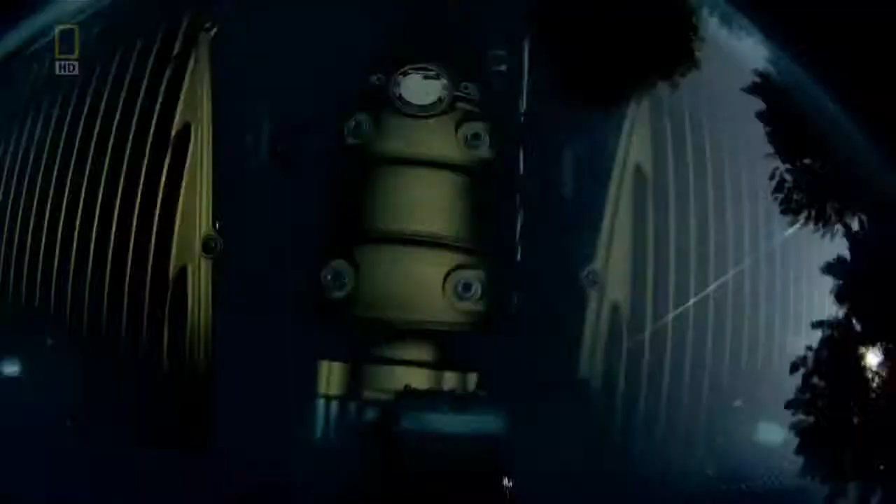This is the story of an engineering crusade to create a car that will persuade the world's richest people to part with €1 million, a challenge that's pushing one of the greatest ever car designers to his limits.

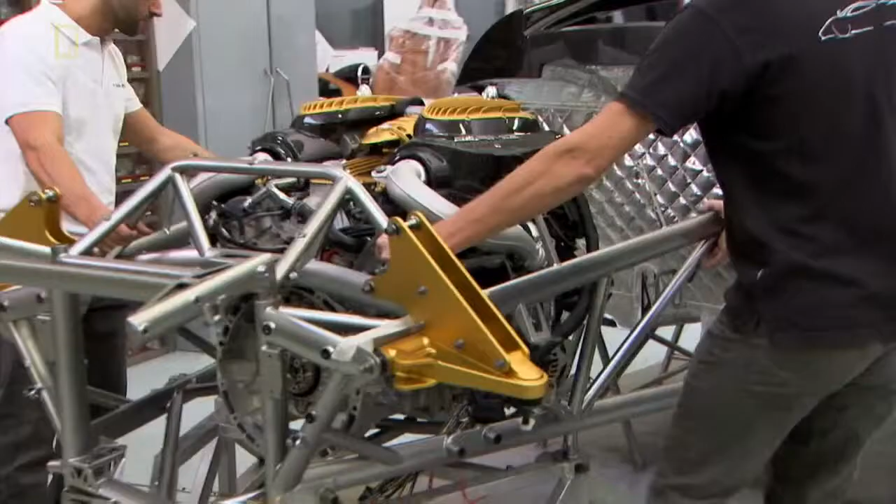In a building that's more like an artist's studio than a factory, a man inspired by Leonardo da Vinci, a man who must be surrounded by the right smells to think, is pursuing his ultimate dream: to build a car that is both an engineering marvel and a work of art. An automotive masterpiece born of a pursuit of perfection so relentless, there's a danger it may never be finished.

Named after a god of wind, this is the Pagani Huayra. A car that has something so special, its creator believes that people will pay €1 million to own one. But why?

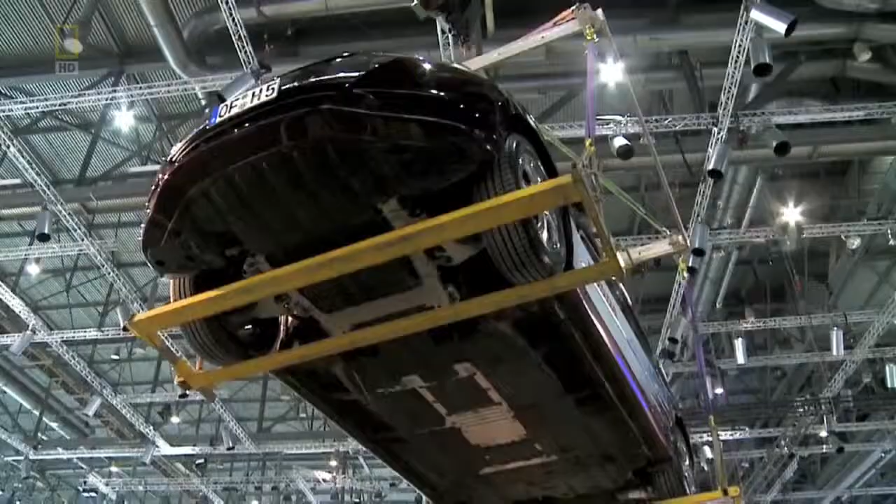At 10 a.m. the doors open and thousands of journalists and car lovers flock to the Geneva Motor Show. The star attraction is the unveiling of Horacio Pagani's new car, his €1 million Huayra.

But there's a twist. While this may look like a finished car, it's not. In fact, despite years of development, it's far from complete. It may sound crazy to expect buyers to commit to spending €1 million on a car they can't even test drive. But not in the world of Horacio Pagani.

Because this is the man whose first supercar, the Zonda, stunned the world on its launch and is considered by many to be one of the greatest sports cars of all time. So within days of the Huayra's launch, Pagani's reputation alone is enough to secure the first orders. And as the Geneva Motor Show comes to an end, the worry for his team is not getting sales, but actually finishing the car so they can build and deliver them.

Back home in Italy, Horacio Pagani has been developing this car for over 8 years. In his pursuit of perfection, he is not a man to be hurried.

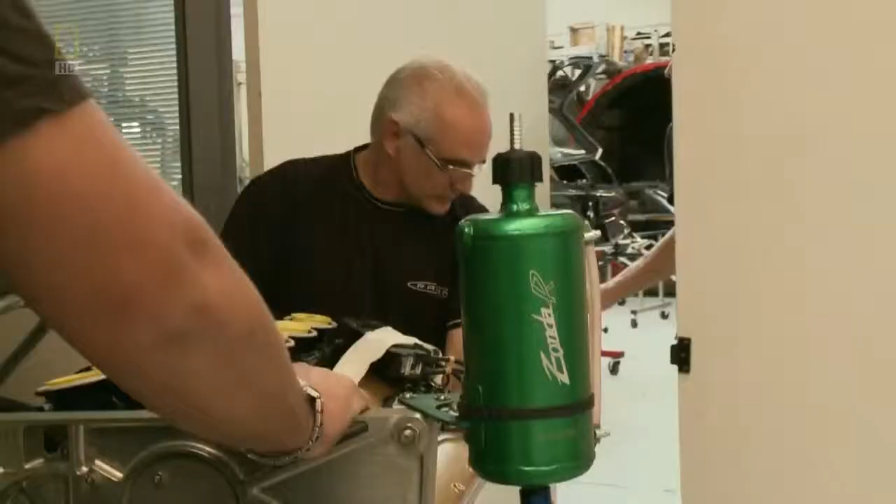Horacio personally designed his small factory, or atelier as he prefers to call it, with his assembly room, component manufacturing, and design studios, all under one roof.

This isn't a place where machines are bolted together by robots. Pagani's master craftsmen hand-build engineering works of art. Over the last decade, they've produced 150 unique Zondas.

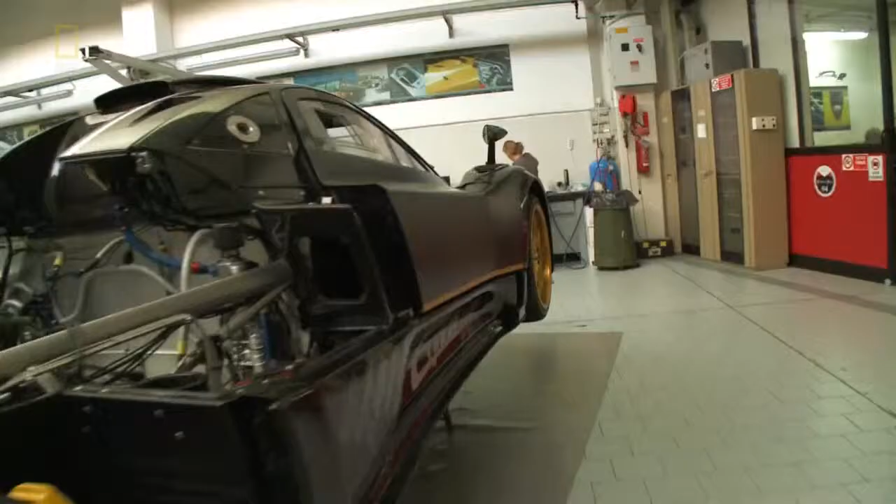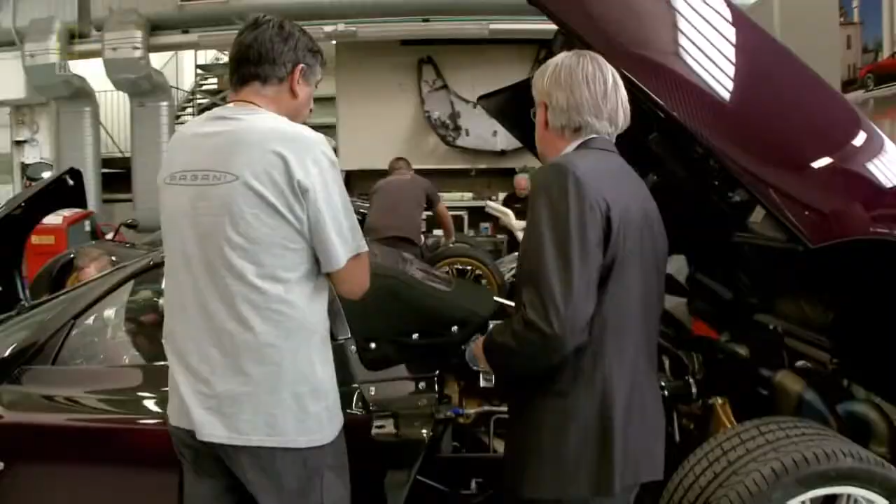But now they're waiting to start building the Huayra, as soon as the boss gives them the nod. But that won't happen until this man's work is done. And 800 kilometers away in Germany, he's still got plenty to do.

Because before any customer will be allowed to drive the Huayra, its extraordinary power and performance must be tamed. Over the last 2 years, Davide Testi has driven a series of Huayra prototypes the equivalent of 25 times around the world. I am the million-kilometer man in the €1 million car.

And follow me, and this is my office.

Today, a full 6 months after the launch in Geneva, Davide is getting his first taste of a vital new addition to the car: Bosch's ESP, Electronic Stability Program, a step on the road to a crash-proof car. The system goes far beyond traction control and anti-lock braking, with electronics that can assist or even override the driver to keep the car on the road.

Straight away in this tight corner, I am accelerating fully, and the ESP helps me straighten the car, keeping me on the road. But making this futuristic system work on this car is going to be no mean feat.

Combining a very light overall weight with a massive 730 horsepower, even a racing driver like Davide must show respect. This monstrous 700 horsepower, 1,000 Newton meters of torque is something truly awesome.

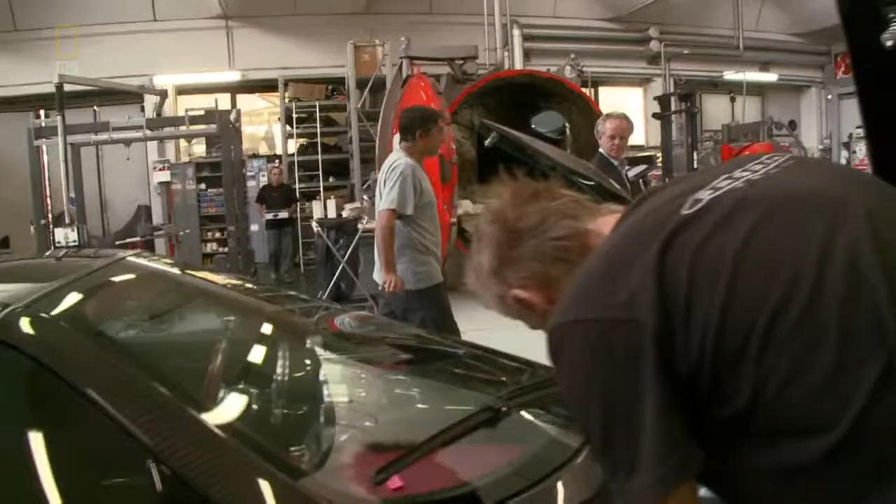Down in assembly, a new chapter for his team of mechanics begins. And the first job is to get their heads around the new parts.

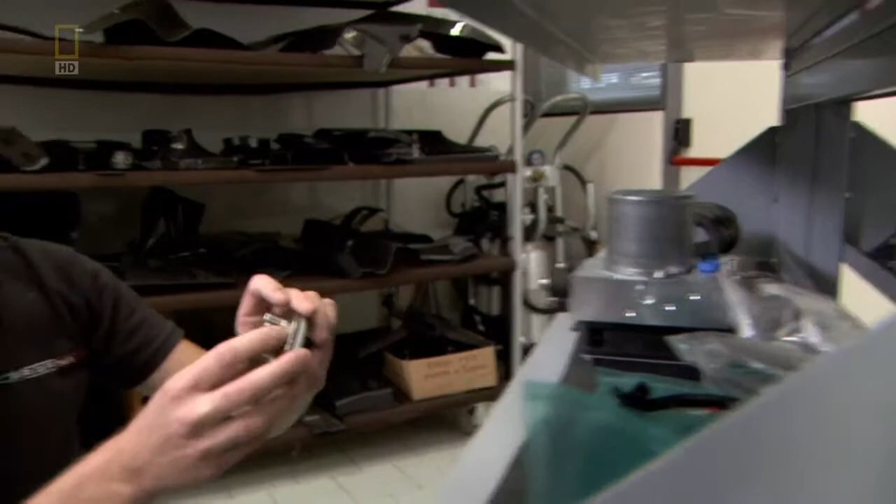Well, this has all been prepared by the guy in the stores. This is a control unit and the ABS. Obviously, you've got the monolock wheel nuts here. These are the suspension arms. Perfect. As you can see, everything's got their part number. Everything's marked with the Pagani logo. Every washer is like detail. It's like it's a work of art.

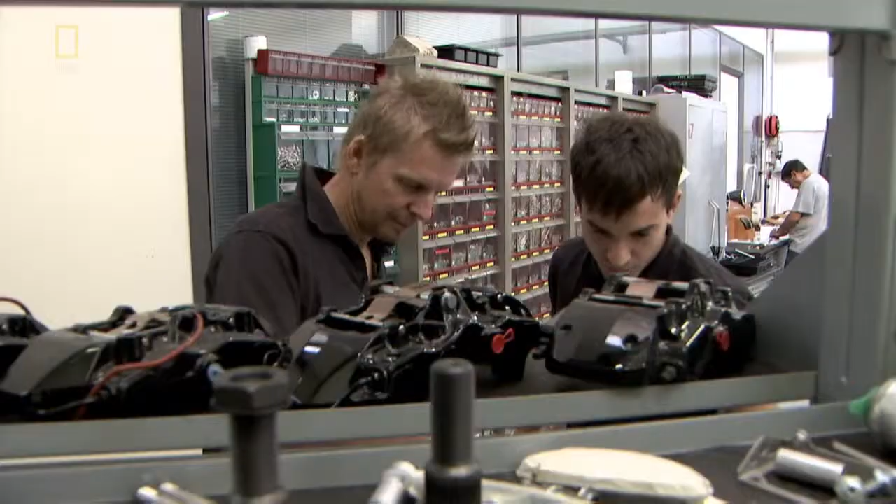Every single thing. Today is a bit of a shock to the system for Dave Lambert, who's built 90 Zondas here in this room. It's all new for us, and it's quite emotional, really, because for 9 years I've been used to putting together the Zonda. So this is like everything's new. It's like starting a new job.

The whole thing will be held together with 1,200 titanium bolts.

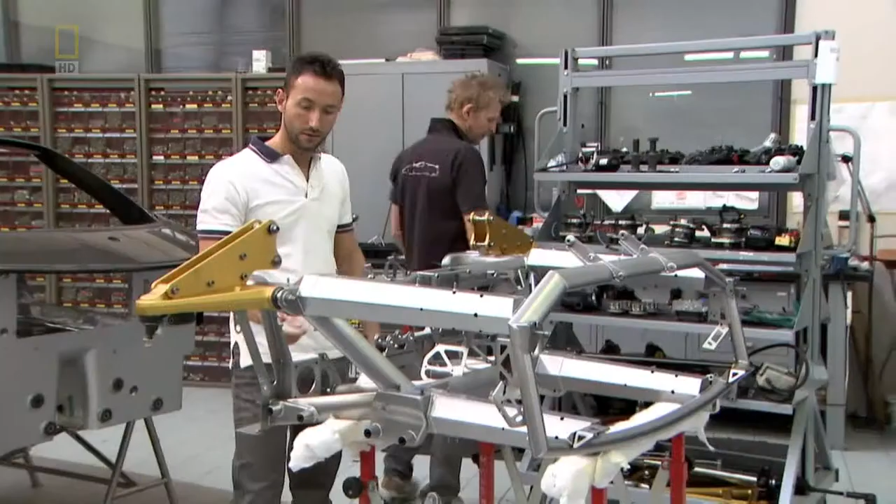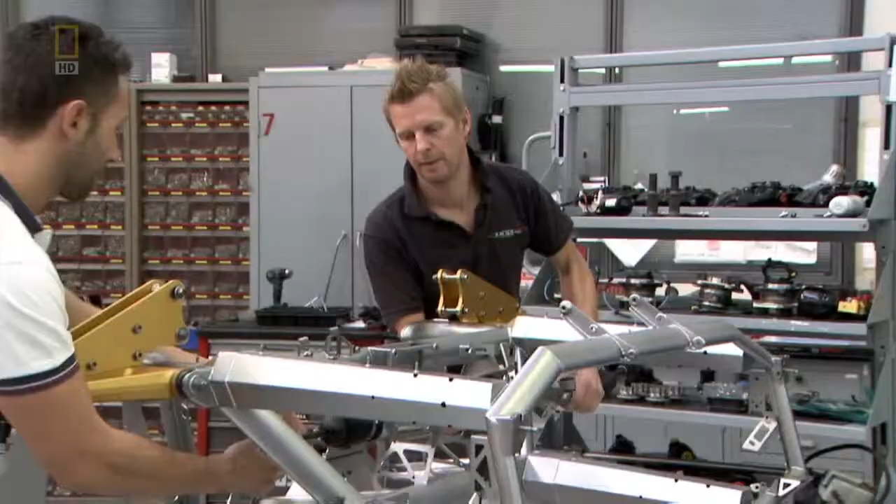At €96,000, that's more than the cost of most complete cars. But there's no manual on how best to build a Huayra, so Dave and his team must make it up as they go along. The first part of the job is to build the front and back chassis, two lightweight frames made from a strong form of steel called chromoly. These will later be bolted onto the front and rear of the driver's compartment. Most of the heavy mechanical components will be fitted onto these frames, including the hardware for the Bosch ESP system.

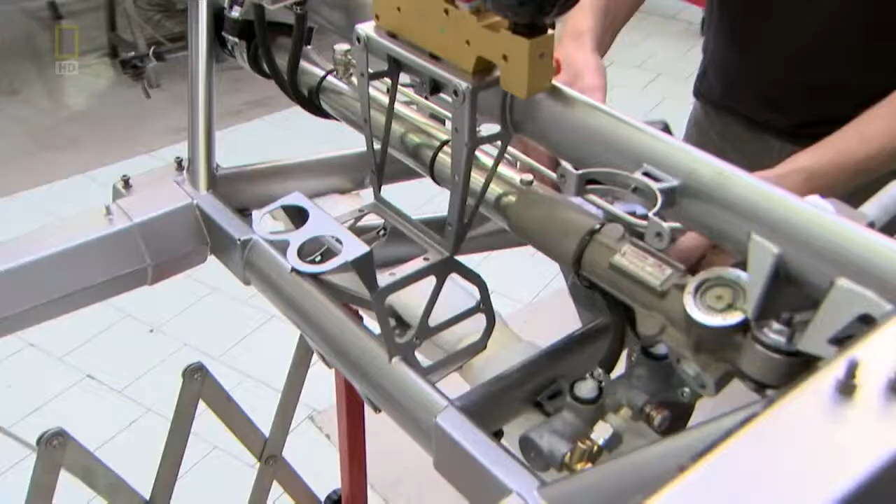But what to do first? We're just learning that maybe we should have put this on first. Now we've just learned that maybe it's best to put the ABS on before the steering rack. Makes life easier.

While Dave tries to figure it all out, Horacio is never far away, keeping a close eye on the birth of his latest creation. One of the things we don't like about Horacio is that when we go out for lunch, we're just about to clock out and he turns up.

Dave needn't worry though. Horacio is in no great hurry, because even though he has agreed to begin assembly, no customer cars will actually be completed and delivered until the performance has been perfected. Horacio's vision is to create a car with a split personality, a machine that can provide the legendary thrills and speed of the bad boy Zonda, but has a softer side, a car for all seasons, to take the kids to school or on a luxurious cruise through the countryside.

So this is where the ESP really comes in. It's the key to creating this two-headed god. Davide must fine-tune the system's two very different modes.

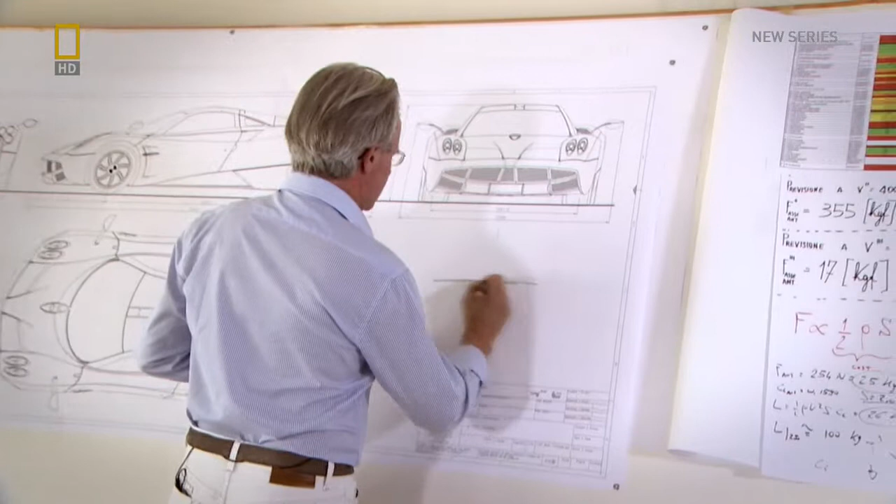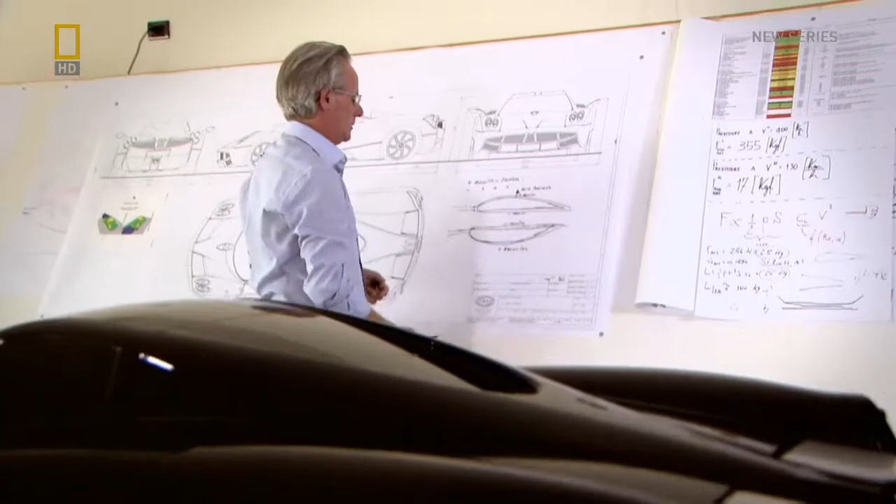With his extraordinary passion for cars, Horacio is not a man to rest on his laurels. So in 2003, despite rocketing sales for the Zonda, he informed his team it was time to pursue a new dream, one so ambitious it would put both his reputation and the future of the company on the line.

Horacio started planning his perfect car with unique engineering features, immense power and speed, but also a softer, more feminine side. Most importantly, named after an Inca god of wind, the Huayra must assault the senses and create intense emotion worthy of €1 million. This is our mission, to really discover what it is that creates...

When I read that, it was like a window opened, and I discovered the path I wanted to follow.

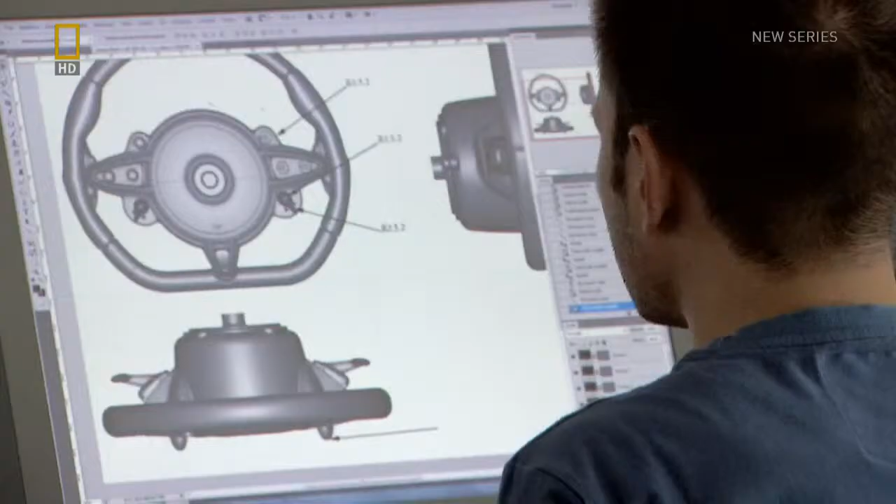In the design studios, Horacio put his team of young designers to work to create the blueprints for the Huayra's 4,700 components, many redesigned literally dozens of times, until the boss was happy.

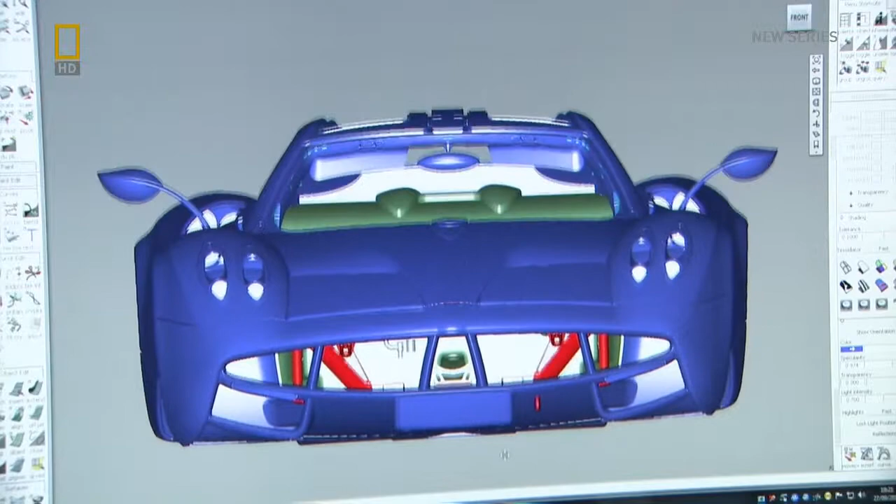For him, it is fundamental that an object is both beautiful and, at the same time, functional. Inspired by Da Vinci, Horacio is determined that every single one of those 4,700 components will not just be made of the finest available materials and be superb engineering.

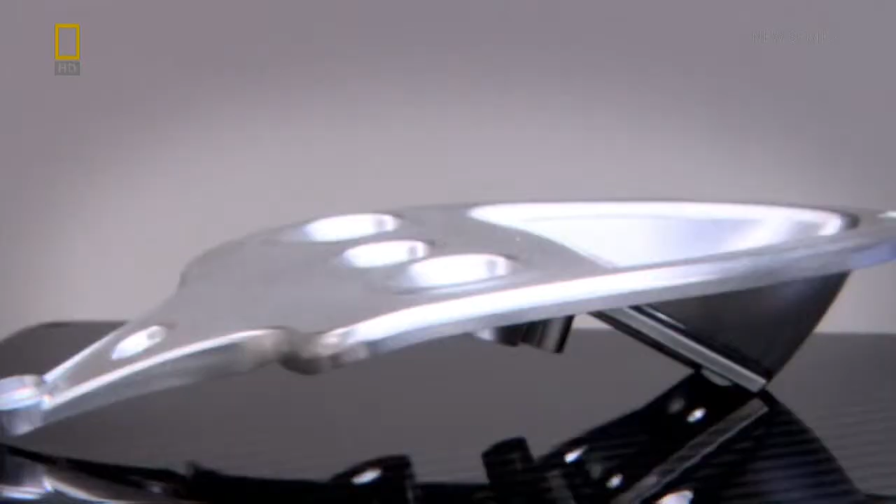Every last bolt and bracket must itself be a work of art. So Davide Pizzo has had to quickly learn to think both like an engineer and an artist, starting with the overall shape of the car, which is inspired by a great example of form and function in harmony, the wing of an aircraft.

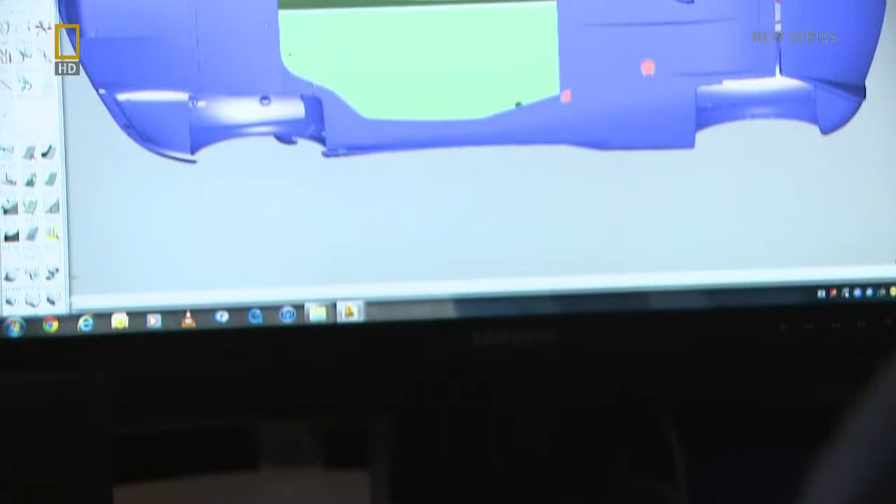From that simple sketch, the long road to the finished design began, from computer screens to a series of scale models, to a full-sized wooden Huayra.

Pagani asked us to completely clear the finishing area, so the machines were taken outside, the trolleys were moved, and he positioned the model of the car in the middle of the room.

I remember that Pagani spent, I would say, many hours sitting in different positions around the car, because he had to understand the shape of the car from every angle.

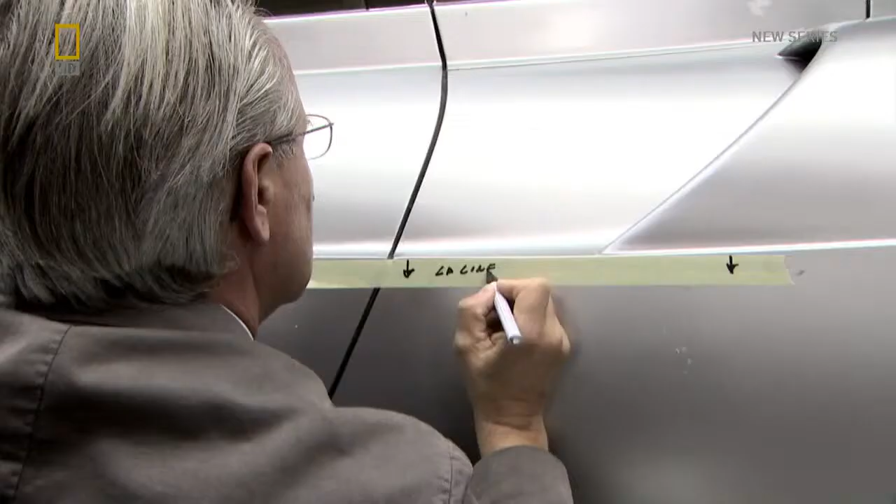It is only with the one-to-one scale model that you have a complete perception of the shapes and how the lines run. For example, this line that we have been watching for a long time should be more pronounced.

At every step along the way, Davide and the design team must think how each small change will affect both the look of the car and its physics, the aerodynamics.

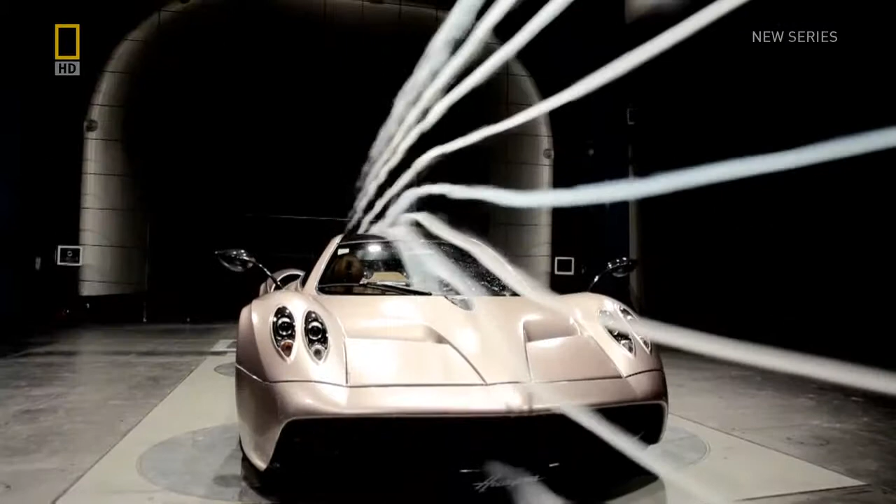For a high-performance car, you want to maximize downforce but minimize drag. The problem for Horacio is that most high-performance cars achieve the downforce they need with what he sees as a great big compromise, a rear wing or spoiler.

The Zonda is no exception. At high speed, its huge rear spoiler helps glue the car to the road. But for his new perfect car, Horacio wants completely smooth, uninterrupted lines.

To achieve this, he's ripping up the rulebook of sports car aerodynamics, with a solution, if successful, worthy of Da Vinci.

Inspired, like the car itself, by the wing of an aircraft, Horacio has designed a system of 4 independently operating aerodynamic flaps. And what better place to test it than at one of the fastest tracks on the planet?

The 4 flaps are automatically controlled by the car's onboard computer, providing extra grip from downforce only when you need it.

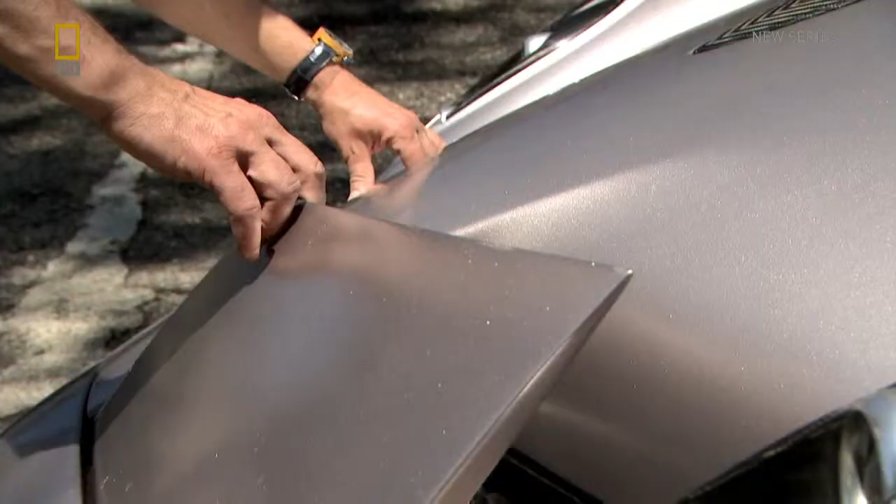If it catches on, this innovation could change the look of all sports cars for the next generation. A technical solution better than a rear spoiler that also delivers the pure, uninterrupted lines that Horacio so wants for this car.

And a perfect example of the philosophy of art and engineering that he's been pursuing since childhood.

The son of an Argentinian baker, Horacio spent his childhood dreaming of building Italian supercars. In 1984, he got a job at Lamborghini and moved to Modena, where he quickly became an expert in a new aerospace wonder material being used in sports cars for the first time.

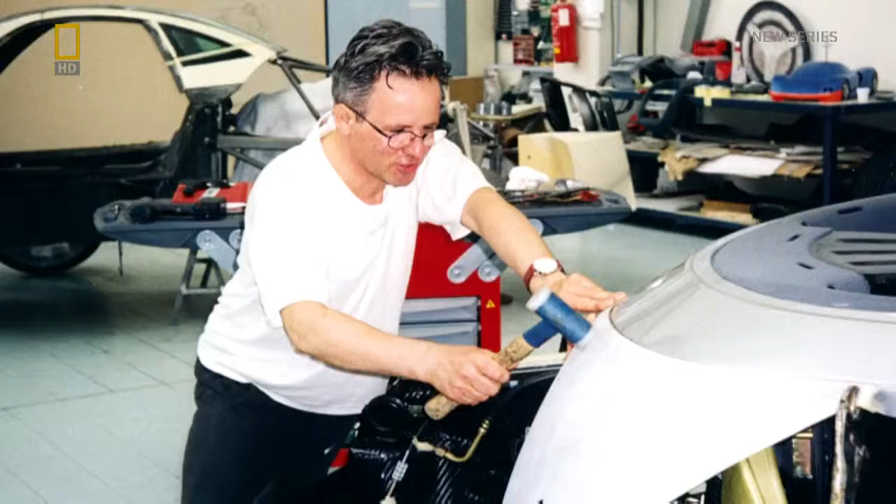Over time, I made friends with carbon fiber, an extremely technological material. Of course, at the beginning, it seemed to me like something from outer space.

When he built his factory in 1991, Pagani started out as a composites company, designing and building components for the industry.

Composites have unrivaled strength-to-weight ratio and the versatility to produce extraordinary objects of desire. So remaining a world master of this material is essential to Horacio's mission to create a perfect car.

Today, the responsibility for keeping Horacio's composites on the cutting edge falls to one of his most loyal young protégés. I like working with composites because it is a very beautiful material.

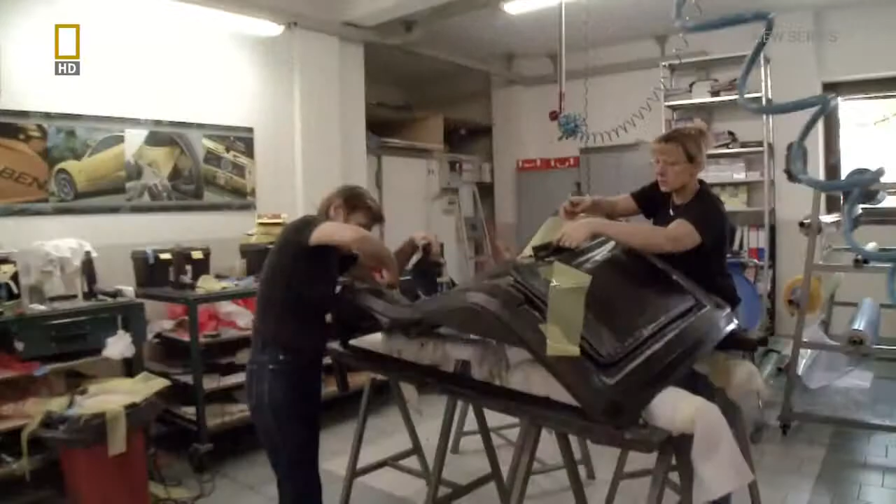It's Roberto's mission to make the Huayra's composite components the best in the world.

Starting with a unique soft fabric produced only for Pagani, carbon threads from Japan are woven together in Germany, then soaked in resin in Italy. Only Pagani knows the whole recipe. The result is our unique carbon fiber, our fabric.

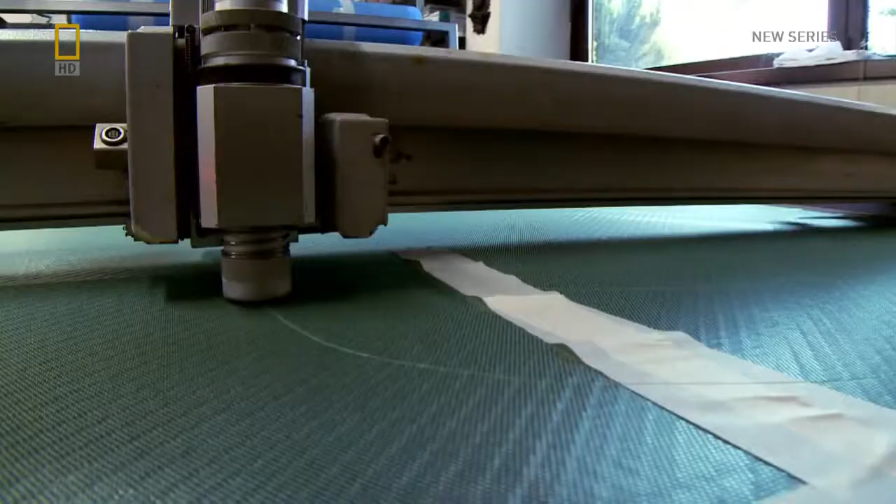In a workshop resembling a Savile Row tailor, Roberto's process of laying up the fabric into molds looks straightforward. But attention to detail here is crucial to the end result.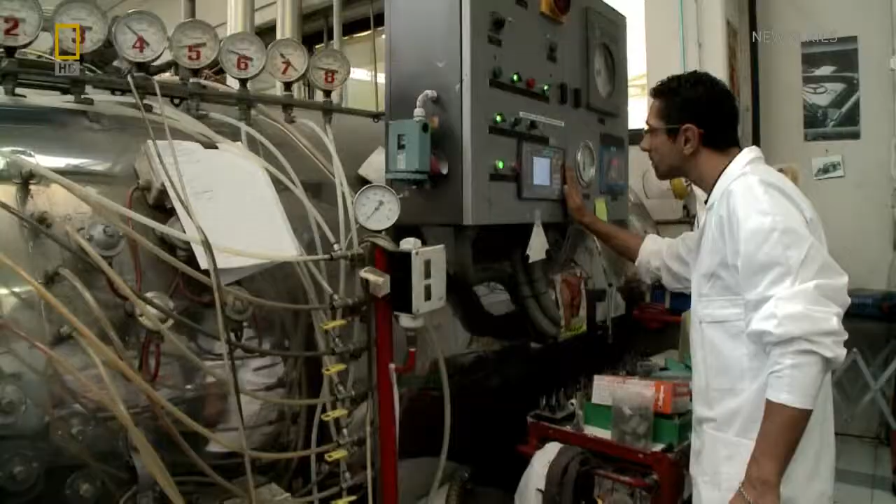Then, each component is vacuum packed for baking. Here we are at the autoclave, which is an old friend to me, because without this machine we would not be able to produce our beautiful car.

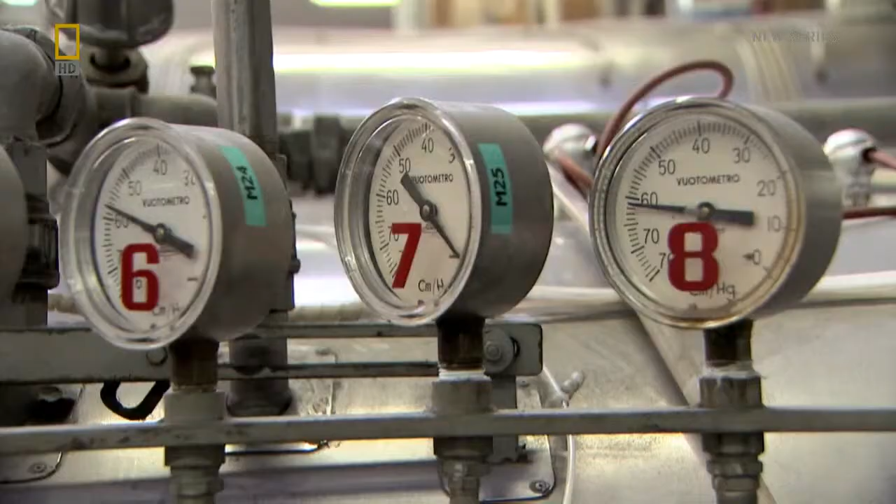As an expert cook, Roberto knows the exact time, pressure and temperature required to harden each part. After 2 hours at 135 degrees Celsius, these ones are baked to perfection.

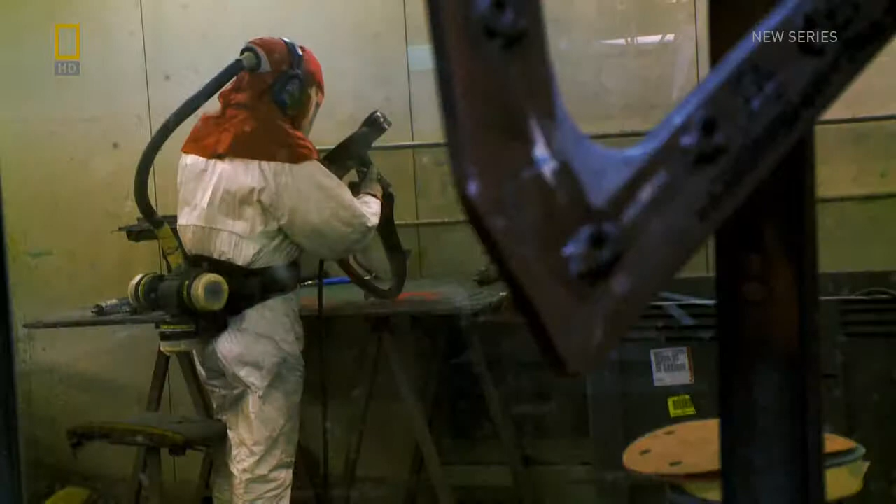Roberto inspects every baked piece, and if it meets with his approval, it's sent off to the nastiest place in the factory, the trim station, where Alessio needs full body protection and breathing apparatus to keep potentially lethal carbon dust out of his lungs.

Before painting, the composite components are assembled into the skeleton of one of the first customer Huayras. It's a standard step to make sure that it all fits together. But here, there's a difference.

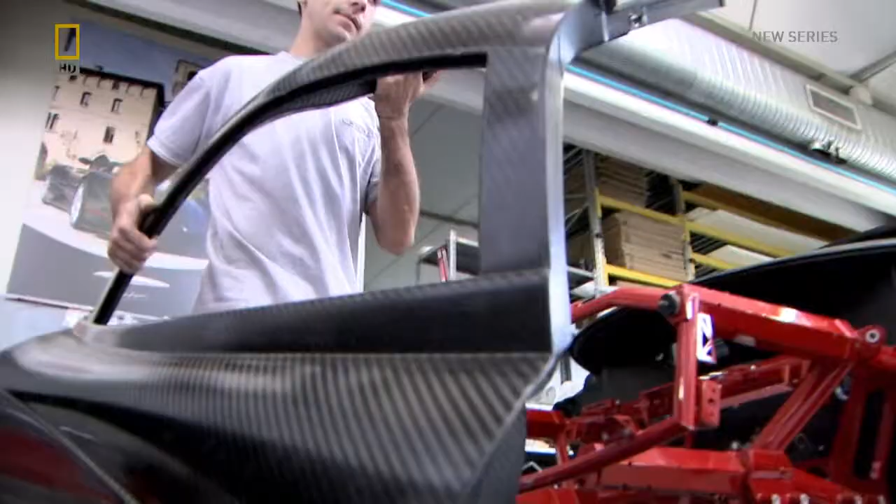This is where Roberto's meticulous care pays off, because every seam of carbon fiber weave must line up perfectly, and if it doesn't, the part will be rejected.

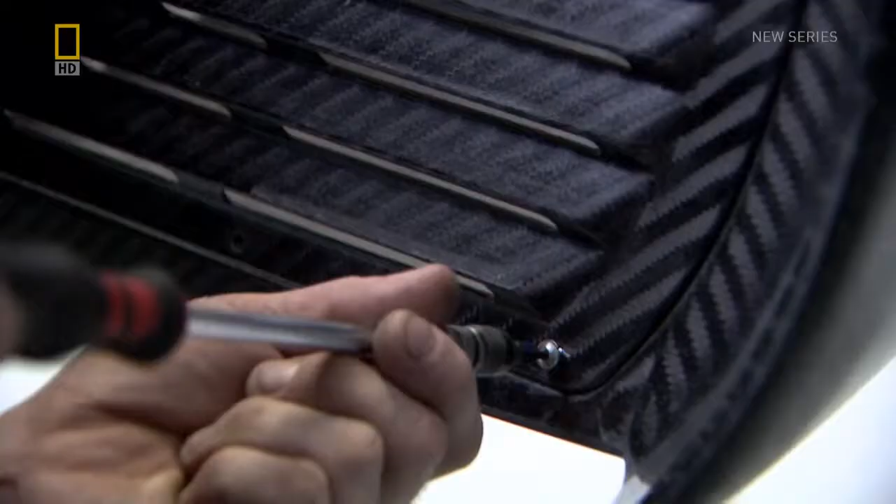The quality is so good, many customers choose to have large areas of polished, unpainted carbon composite as part of their final design.

And of course, Orazio has approved each component as a perfectly designed piece of art and engineering, with exactly the strength, weight and aesthetic form he wants.

This piece supports the seat from under it. This is a piece Pagani is very happy with. This is because if one day a client drops a penny and he looks for it under the seat, this piece is beautiful.

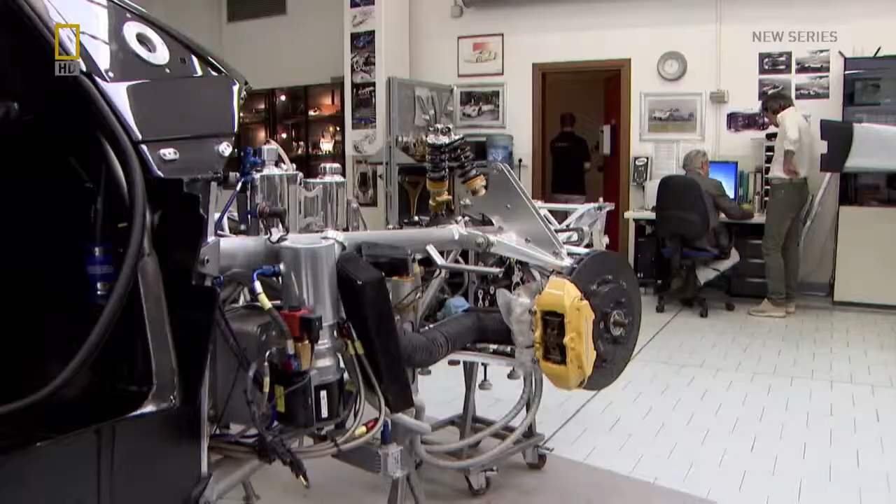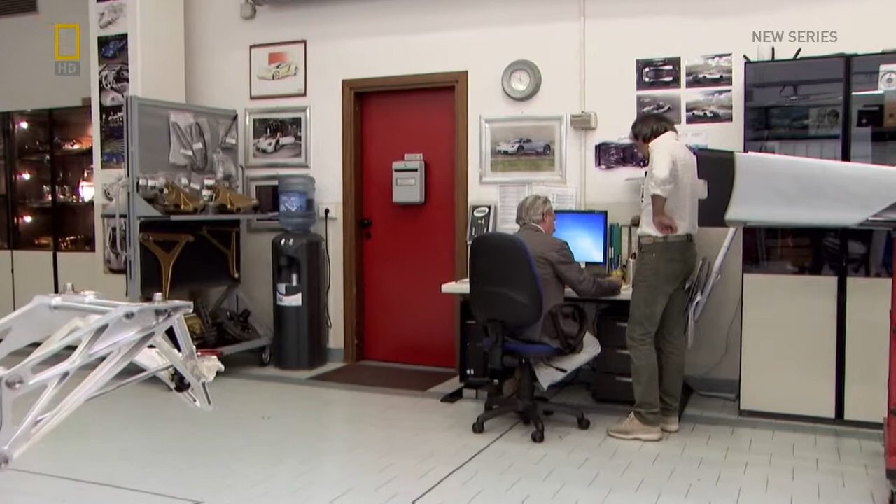As a committed perfectionist, Orazio's hands-on approach is understandable. But to build this car, he will rely on dozens of outside suppliers to build the remaining 95% of its components. And he can't exert the same control over them.

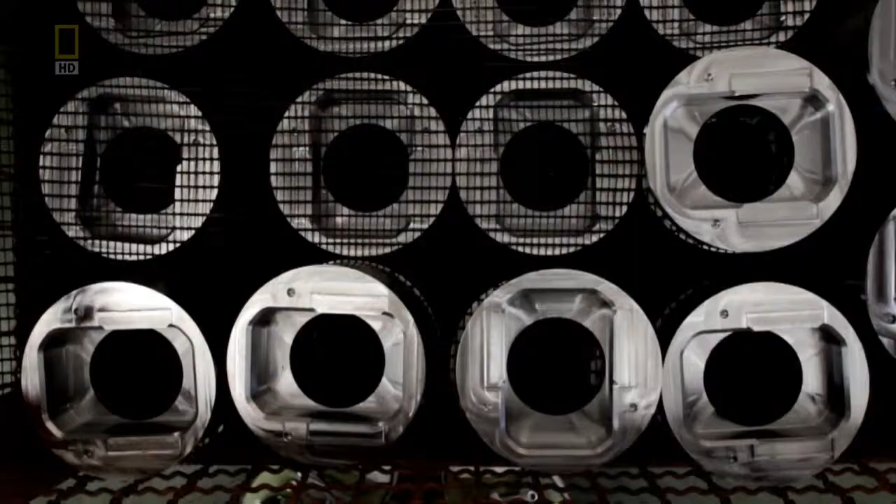This is our old factory where we produce pieces for aeroplanes, products for the nautical industry, and other products as well.

It's efficient and functional, but also dirty, noisy, and smelly. Not really in line with the Pagani way of doing things.

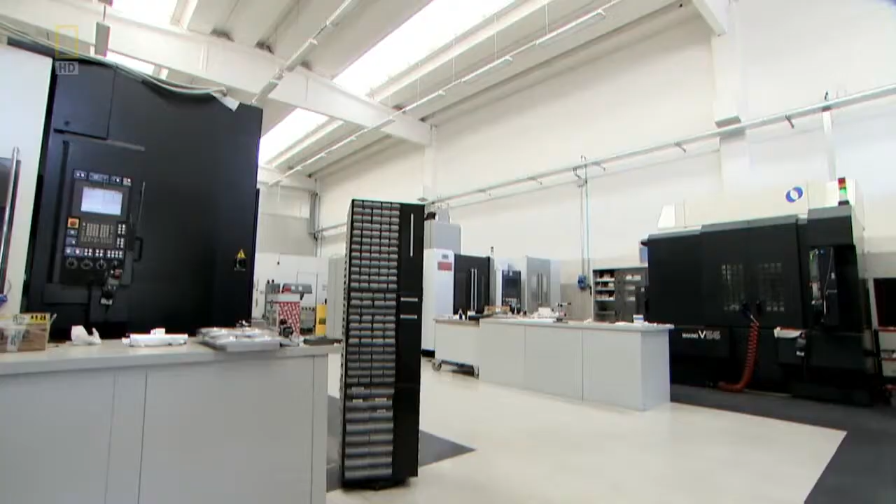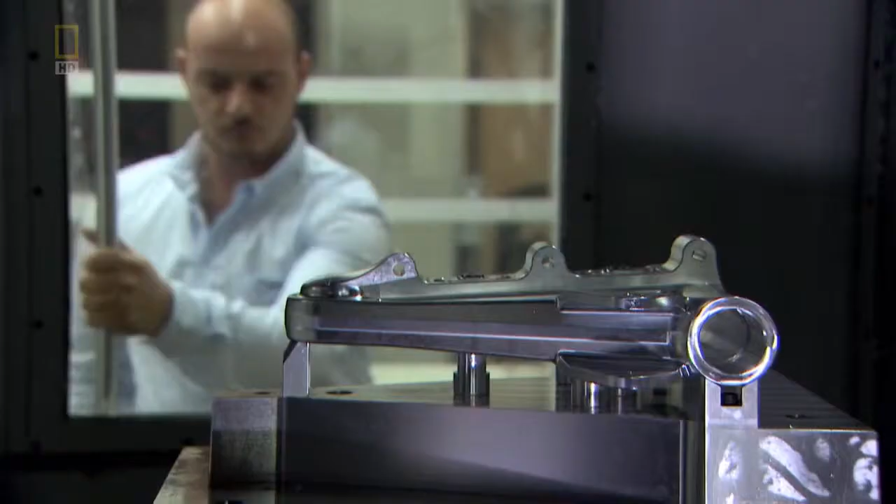To convince Orazio that they were the company to produce his aluminium components, Aspa built a completely separate facility alongside the main factory, filled with state-of-the-art machinery, light, order, and air-conditioned sterile cleanliness.

Even the neatness is higher than in the old department, in order to produce what our customers are looking for, especially Pagani.

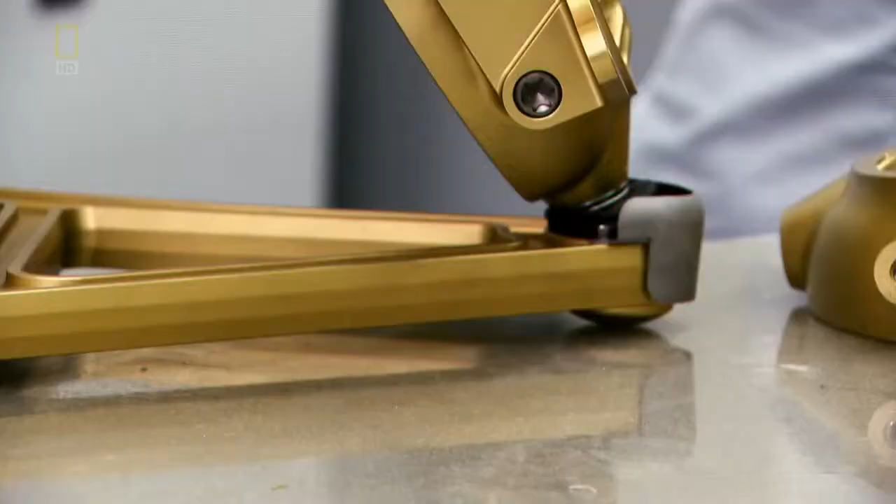As Orazio's collaborator, Maurizio must embrace his crusade for perfection. When Pagani designs something, Aspa must work out how to make it from a single block of aluminium. Sounds simple? Not with Pagani.

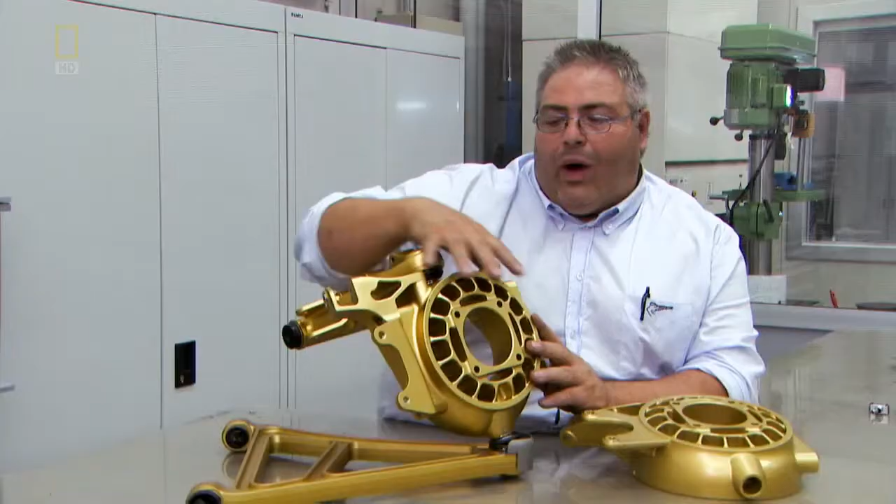Early in the design of the Huayra, the development of this two-part wheel hub became a labor of love. When, after a year of study and work, the first component was created, Pagani had some doubts about it.

I was not convinced, because there were many bolts, there were many components and parts that could break, and for me, it wasn't aesthetically the best.

So the two companies worked together to develop a totally new single-part wheel hub. Of course, it seems a very simple result now, but it required deep research and almost 1 year of manufacturing. It's not been easy to make, to achieve this result.

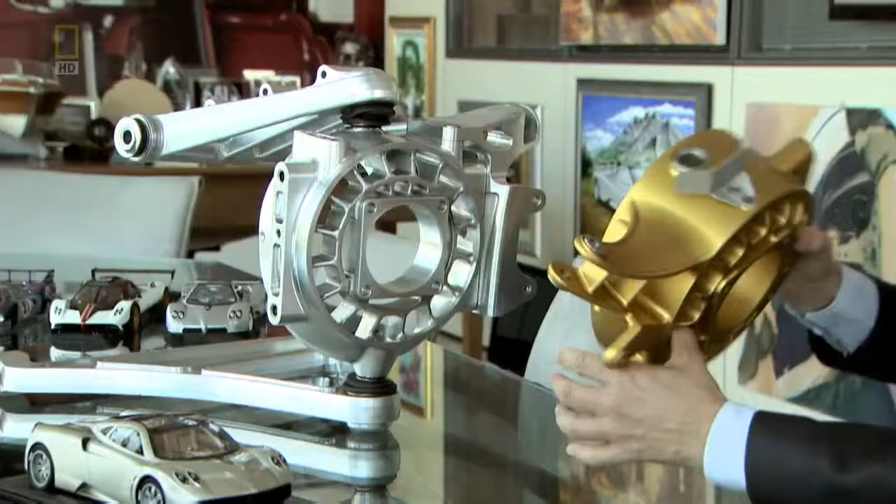It may not have been easy, but the end result cleverly combines two parts into one, saves weight, is cheaper to manufacture, and for Orazio at least, is worthy of exhibition in a gallery.

But apply that approach to 260 different components, and Aspa had their work cut out. Orazio has made Aspa his collaborators, not his suppliers, and he has made them better. The facility they created for Pagani has now attracted over 15 new clients, and business is booming.

For Orazio, this tough, no-compromise approach is essential to achieve his perfect car. So he spent years building up an international network of tried and trusted collaborators, working closely to develop his tires, engine, gearbox. In all, over 95% of the car.

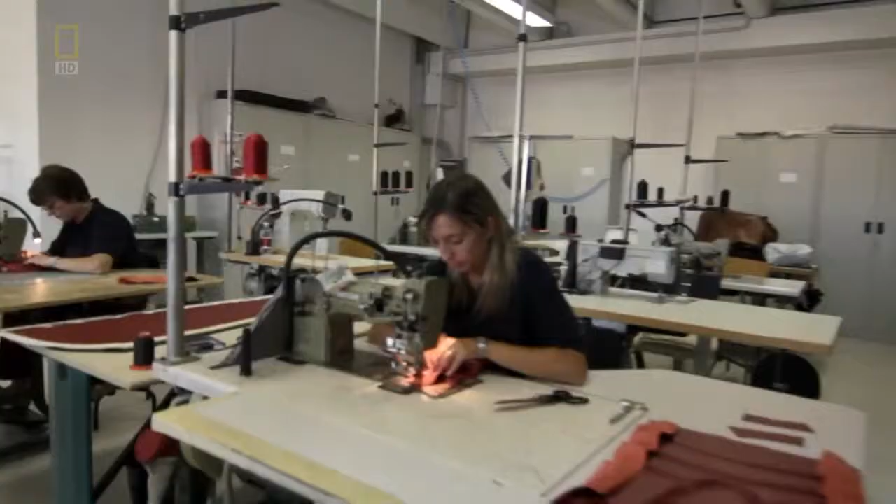For the leather interiors, he chose a small company near Turin, who he felt were ready to think outside the box. Salt is a handcraft leather factory that's been producing luxury interiors for cars, private planes, and even helicopters for decades. And here, Orazio found another kindred spirit.

For us, it's very important to work with Pagani, but it is also a challenge at the same time. It is hard to obtain what he wants because he is a very particular person who always strives to reach the top, so there is no room for errors.

The leather interiors will be a key part of Orazio's assault on the senses: vision, touch, and even smell. So from day one, he was determined to push Silvio out of his comfort zone.

So before they came in, I sprayed some scent of freshly cut grass, just like when you cut it with a lawnmower. It was a device to take the tone, let's say, of our conversation and also our souls to a higher place.

In that higher place, they might be more receptive to the impossible challenge Orazio had in mind. Something quite feminine. When I told them what I wanted to do, I showed them a lady's handbag.

This didn't fit well with the daily usage we have in a car, where the durability of the material has to be very high. They pulled their hair out and said it was impossible to make a type of leather like this and use it on a car.

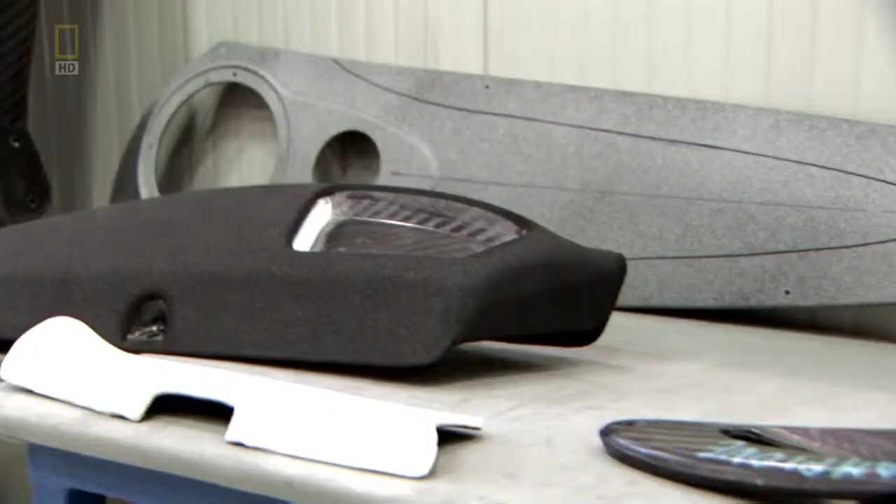On the ground floor, the leatherwork is united with complex composite components that have been sent over from Modena. Carbon fiber seats, side panels, dashboards. Foam padding is applied and shaped.

Then the bespoke leather skin is carefully smoothed into place, almost as if it's going back onto the animal it came from. It's stuck on with special maneuverable glue. When the leather's in exactly the right position, the glue is set with a hairdryer.

I think that after all this work, we managed to reach the required level of quality. We're satisfied with the product, and I believe Pagani will be happy too.

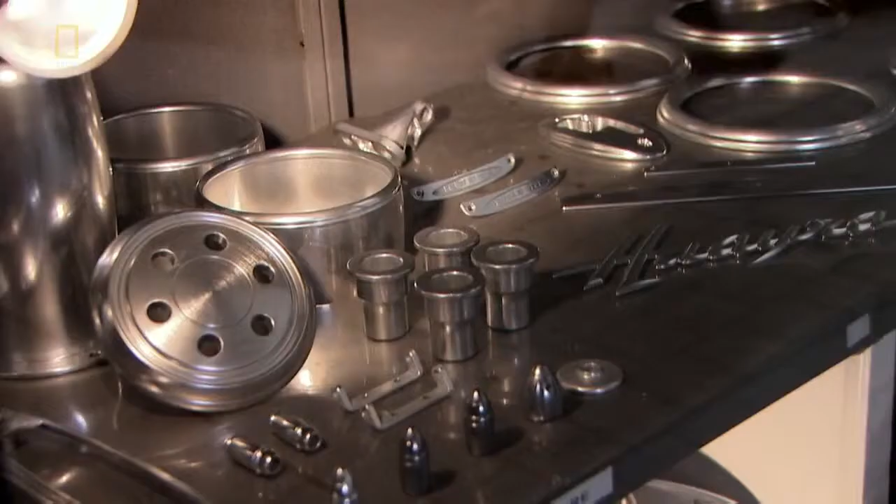In fact, Orazio is so pleased with his collaborators' work, he displays their components like trophies in his art gallery of parts at the factory. Orazio may regard them as his art collection, but Dave Lambert's desperate to get them out of the cabinet and onto the new car he's assembling.

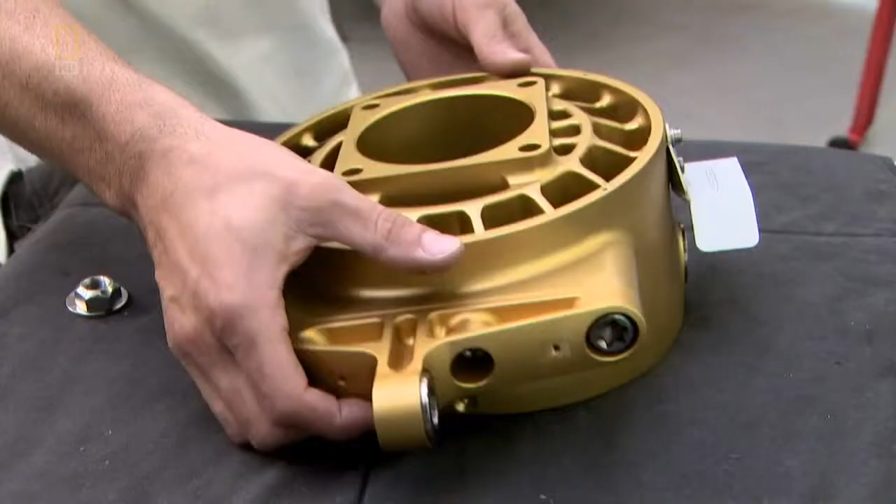The suspension pieces are the first aluminium components to go on. Racing-style wishbone suspension, developed for weight loss, performance, and aesthetics. This suspension here was actually developed first of all on the Zonda R, on the race car. It's very, very similar, almost identical to the Zonda R suspension.

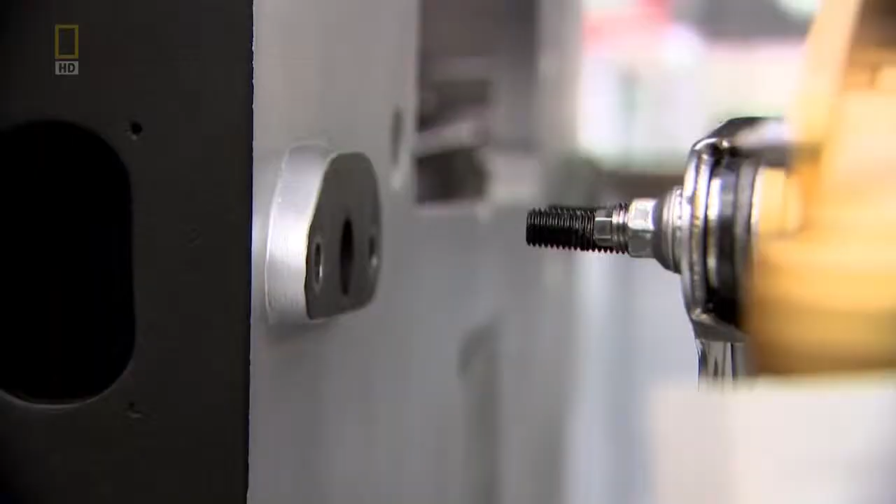With all the mechanical components in place, the chassis frames can be attached to the tub, which is the key component in the safety design of this high-performance car. The tub is a protective monocoque for the occupants, made from the strongest composite material in the car, reinforced with threads of titanium.

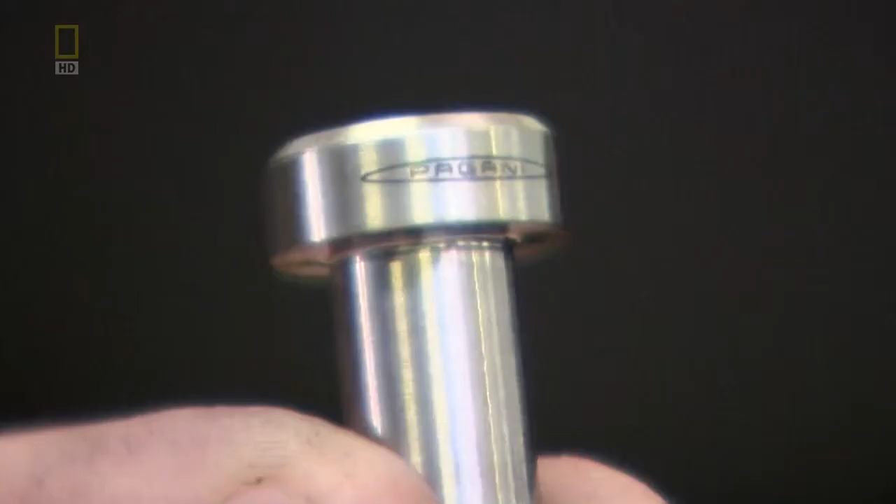But each frame is attached with just 8 titanium bolts. And this is one of the chassis bolts here. Bolts that, when necessary, are intended to fail.

In a head-on collision, the chromoly steel frames are designed to crumple, absorbing the energy of the crash in a very similar way to most cars. But Orazio knows that making a side-on impact survivable can be much harder. So in a high-speed sideways collision, those 8 titanium bolts will snap, and the whole rear chassis will break away from the car.

Dissipating huge amounts of energy so that the passengers have a much better chance of survival, cocooned in the carbon titanium monocoque.

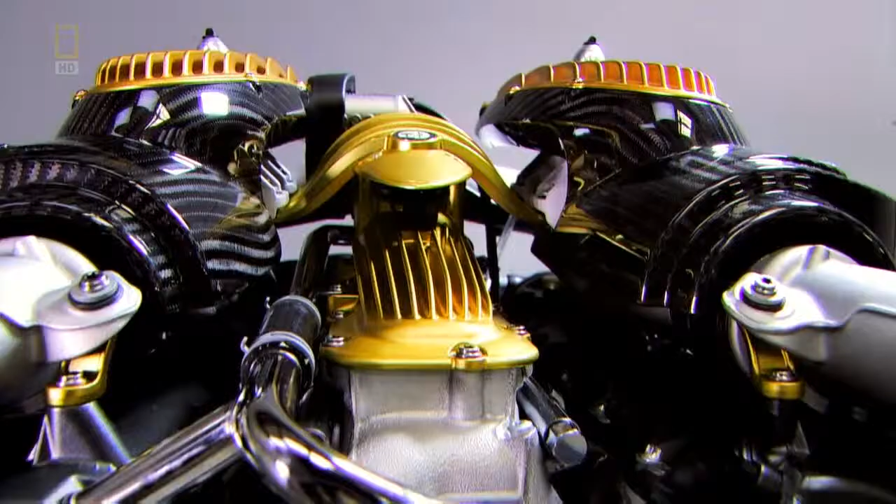A new day brings a new toy for the assembly team. A brand new gleaming 6-litre Mercedes AMG V12 engine, generating 730 horsepower.

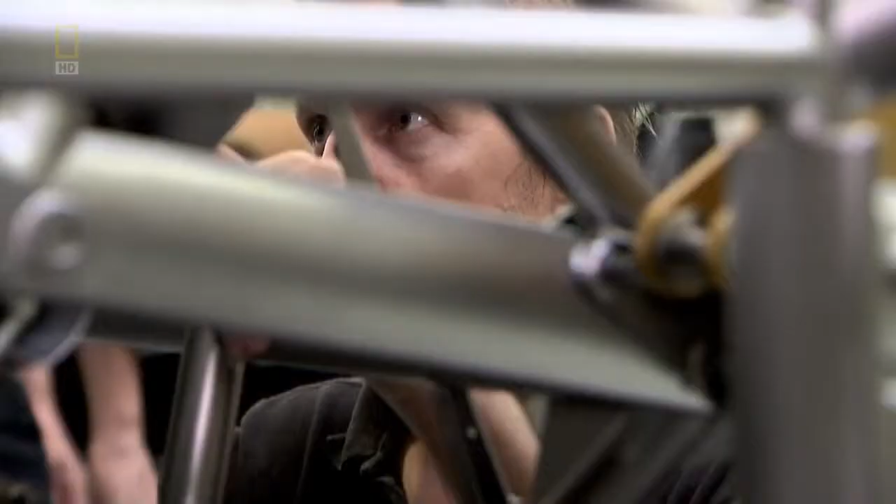But it achieves that using a device that most Pagani fans might not expect: twin turbochargers. A turbocharged engine is the most efficient way to produce the massive power Orazio wants for the Huayra, and will help pass emissions standards to make this car legal for sale in every country in the world. But turbo engines have serious drawbacks.

Pagani made his name with the naturally aspirated Zonda. Its powerful engine has great responsiveness and a mighty roar, qualities not normally associated with a turbocharged engine.

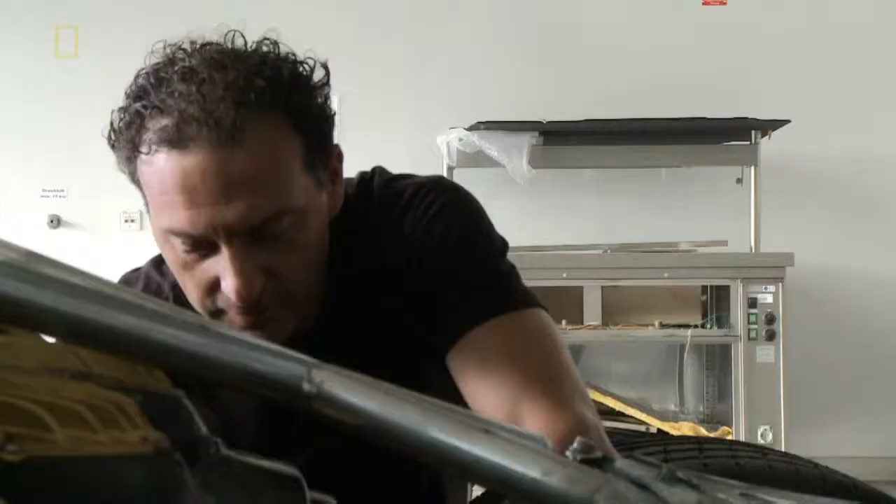So Davide Testi has spent many of his million kilometers working closely with AMG to adapt their engine for the lightweight Huayra. Improvements to the cooling system, the engine management system, and the turbochargers themselves have produced a car with massive but responsive and controllable power.

We arrived at a beautiful compromise, I'd say optimum result, because even though this is an engine with 1,000 Newton meters of torque, the engine is manageable, it's easy to drive. It really is a beautiful engine.

But one very serious problem remained. Turbocharged engines are notorious for sounding weak and whiny. Just not what you need for a successor to the thunderous Zonda.

So to solve this final challenge of creating his perfect car, Orazio went in search of a special talent. A man that can sculpt sound. A master in the dark art of exhaust pipes.

He came to our door, rang, and said, 'Hello, I'm Orazio Pagani.' We met each other here, and it was a great encounter. We got on right from the beginning. He loves technology as much as I do, especially the beautiful things in technology.

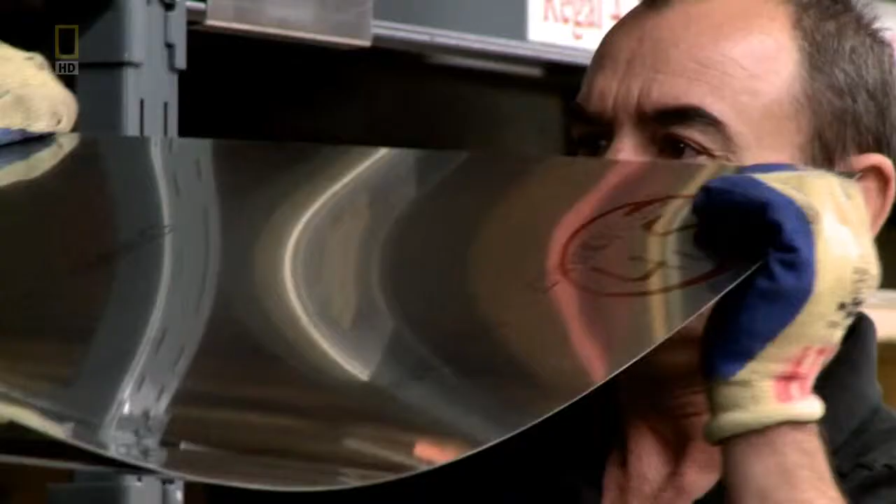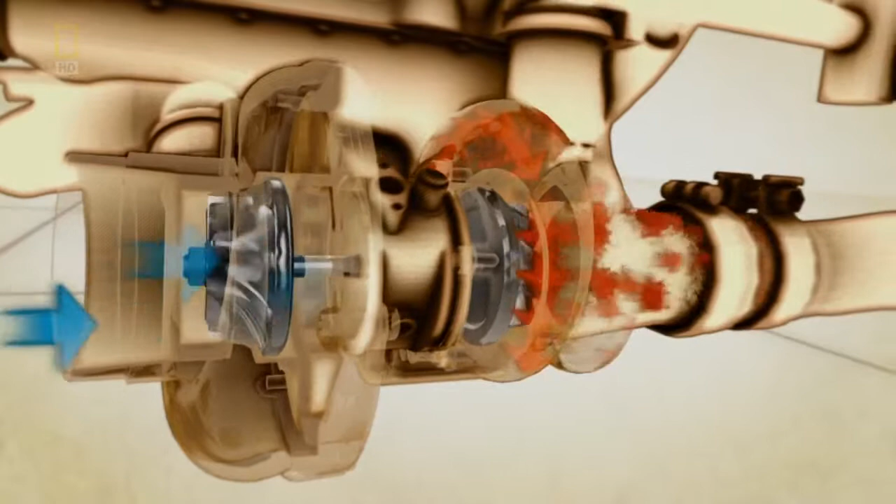Martin and his factory took on the huge challenge of making a turbocharged engine sound good. A turbocharger is a very efficient way to make an engine more powerful. It does this by using a fan driven by the hot exhaust gases, which drives a second compressor fan that pumps more oxygen into the cylinders, producing more power. The problem is the turbocharger breaks up the flow of exhaust gases, mashing up the beautiful thumping V12 sound coming from the engine. It's like a nose being held, so it doesn't allow sound to travel like in a naturally aspirated engine.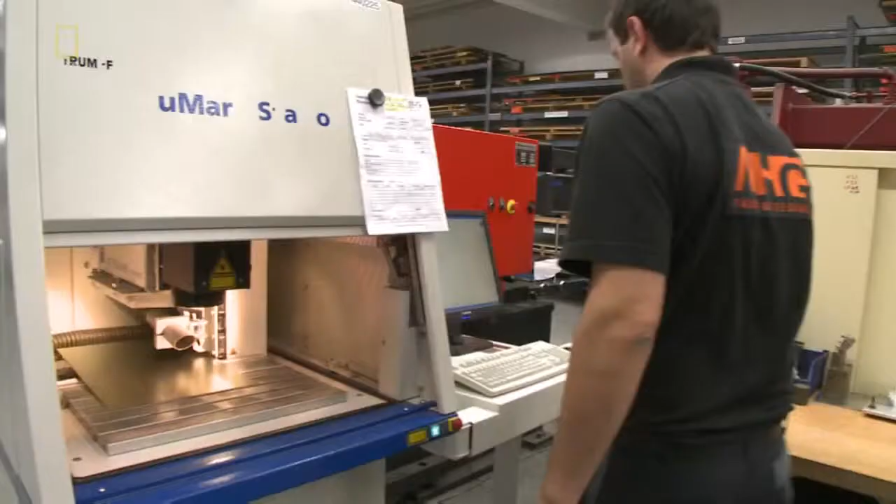Martin Hagler specializes in making engines sound beautiful. But to achieve that with the turbocharged Huayra, he's going to need something very special. Fortunately, he has a plan.

All that you can see here are parts that are tuned exactly to the acoustics of the engine. And that's the basis for the sound. It is the same as the tuning of an instrument, like a horn.

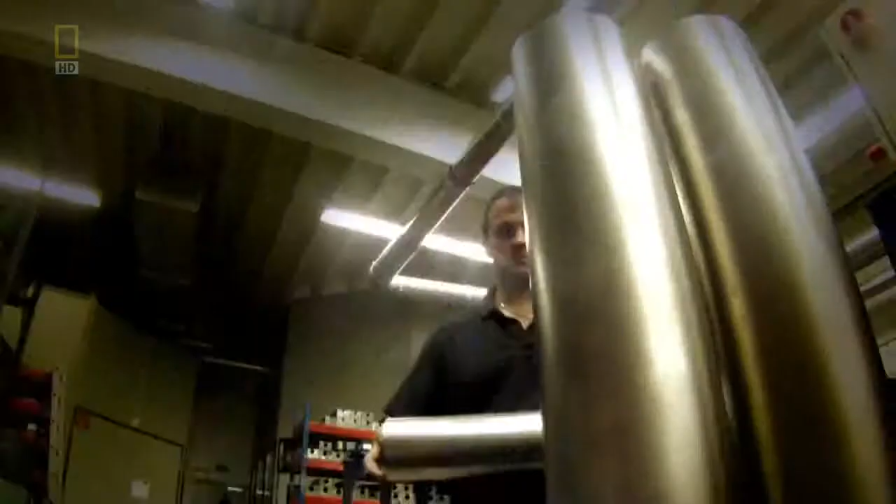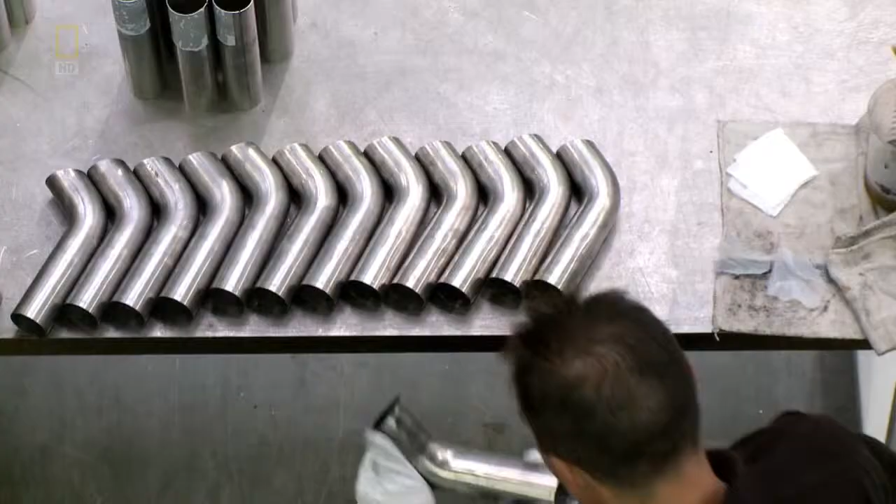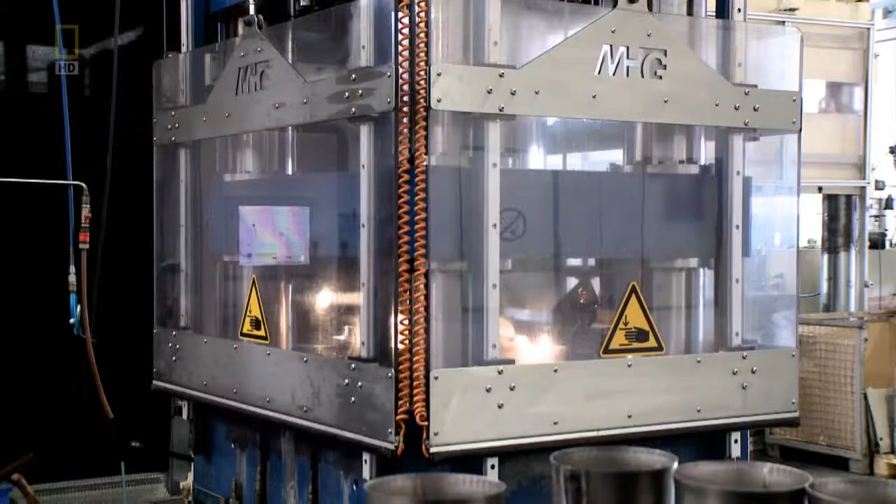The silencer is made this way. A straight pipe is first filled with water, then laid in a mold inside a hydraulic press. The water pressure inside is pumped to 1500 bar, which stretches the millimeter-thick titanium into the desired shape.

It's a very natural shape, very natural and stable. And when you lift it up, you notice it is not heavier than plastic.

Already a thing of beauty, Martin has another trick up his sleeve to enhance the silencer still further. A trick that simply involves a dusty old oven. No chemicals or additives, just heat and precise timing. It looks like a magic trick, but it's a natural process.

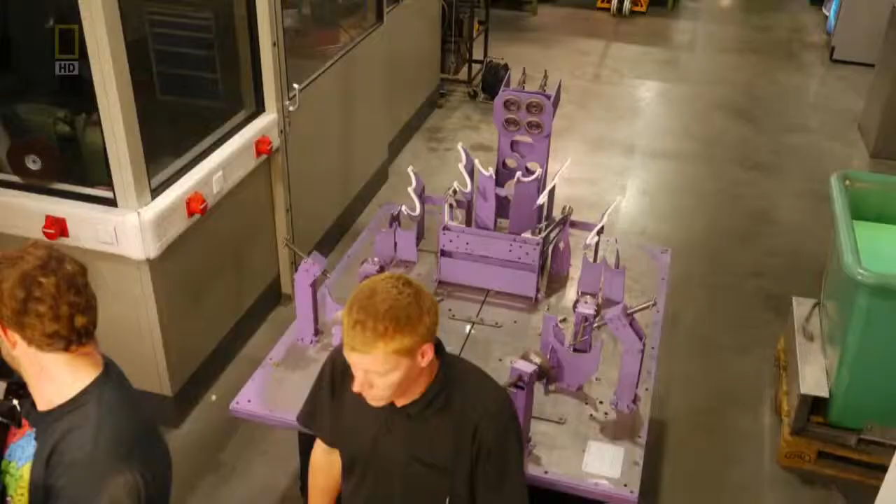Together, Martin believes the 14 sections of pipe will deliver some stirring turbocharged music. First, he splits the mashed-up exhaust from each turbo into two separate tubes. This smooths the quality of the sound.

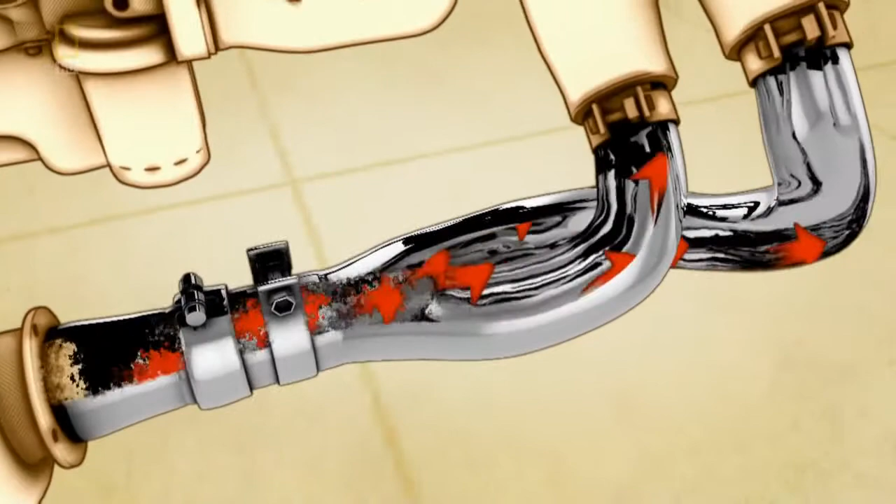Then it passes into the silencers, which in fact aren't silencers, but the opposite, empty echo chambers that amplify the sound. Inside, Martin has left a small gap, like the hole in a flute or a recorder, which the now smooth air blows through to create a roar.

As always, the first to find out if this ingenious design has succeeded is Davide Testi. Driving the Huayra for the first time, you have a feeling of something really massive beneath your back. And the loud noise of the turbos, if you close your eyes, makes you think of an aeroplane about to take off.

For the car inspired by an aircraft, Martin has given Horacio a jet engine roar.

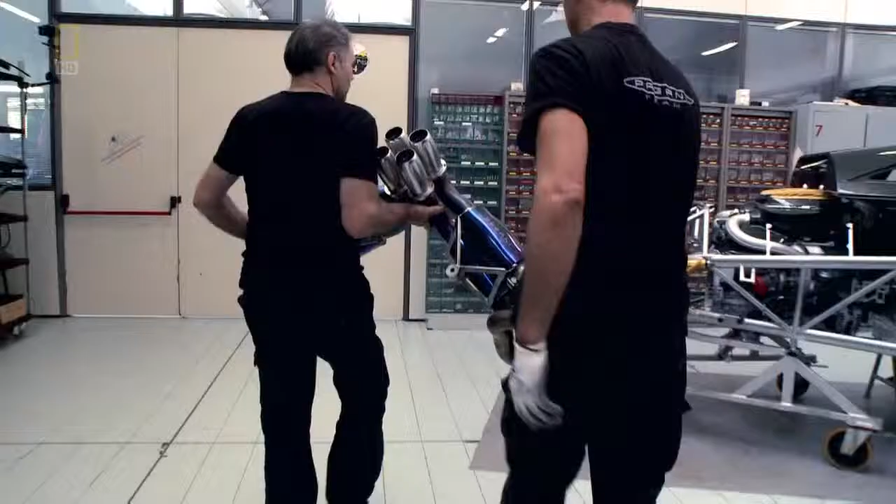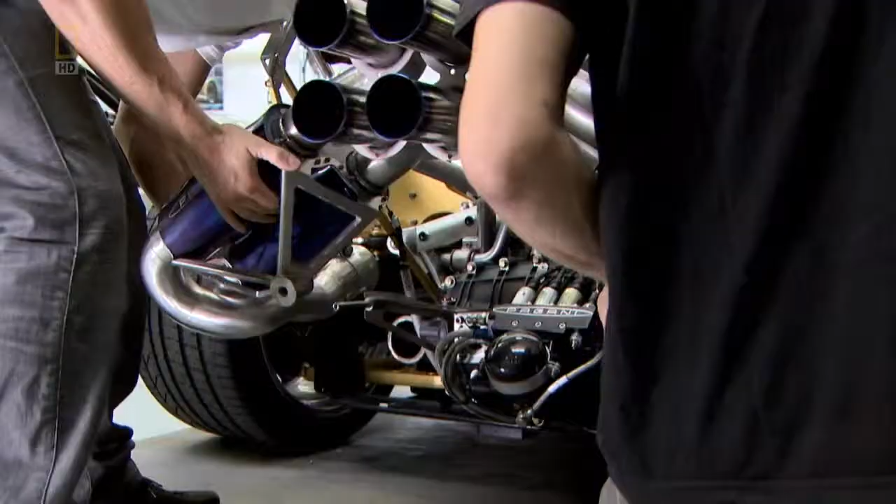With the delivery of the exhaust system, Dave and his team now have all the components they need to complete the first customer cars. The output from each turbocharger is fitted with a catalytic converter, and then the rest of the exhaust system can go on.

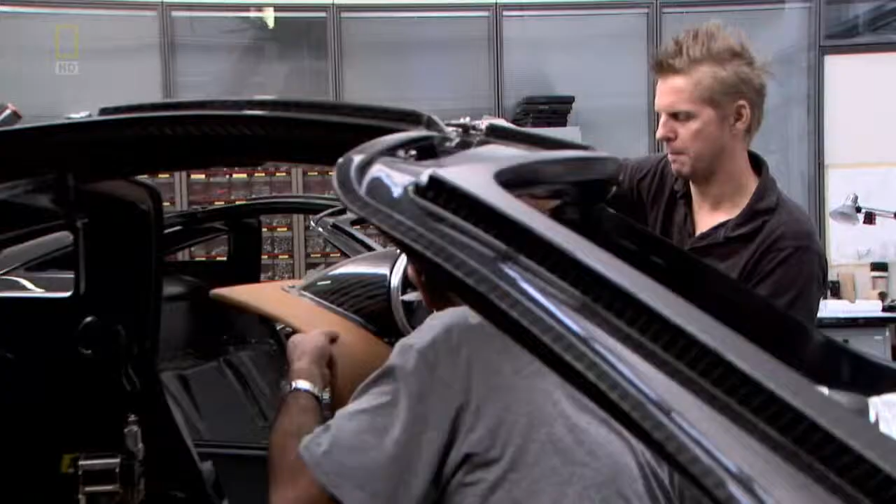Onto the chassis, the skeleton of the car, goes the wiring, the nervous system of the machine. Now work on the interior can begin: polished carbon fiber panels and soft Turin leather to the customer's exact specifications.

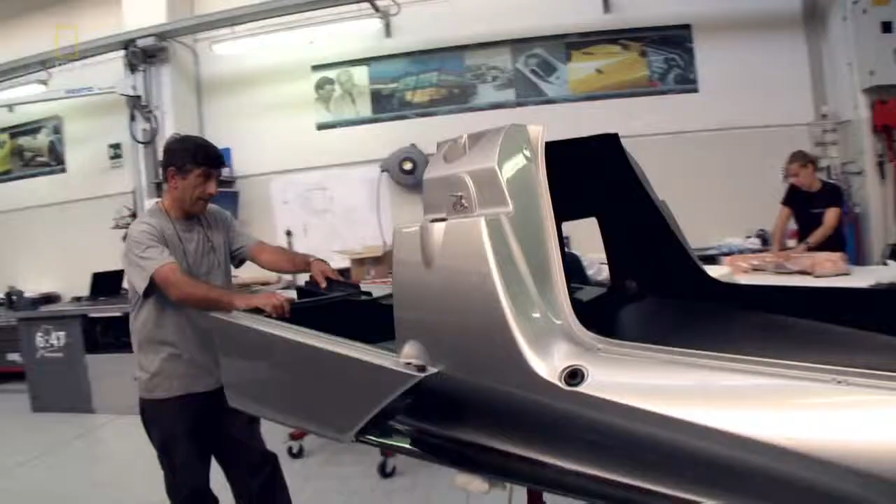Finally, Roberto's outer composite body parts: the bonnet, doors and side panels go on. And after 3 weeks of assembly, the car is complete.

Which means it's time for Davide to take one last drive, to find out if the Herculean task that has taken him 25 times around the world is done.

With turbocharged power and the ingenious exhaust, unique aerodynamics, fine-tuned electronics, and a set of Pirelli's finest tyres, does it thrill with the thrust and roar of a jet aircraft taking off?

A big sigh, and let's say that we are really very happy. I believe that the Huayra is an heir worthy of the Zonda.

The million-kilometre man thinks his work is done. But does his boss agree? Is he finally happy with these lines that he's watched for years?

It has taken time and years of development of materials to enable us to reach this level of perfection, these details, these exteriors.

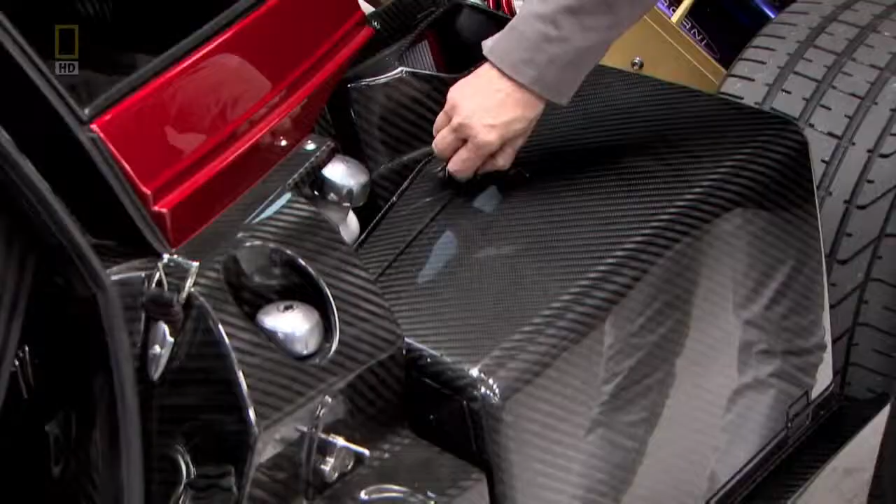So is every smallest detail now perfect? The customized leather luggage, the air intakes that evoke a supersonic jet, the mirrors inspired by a woman's eye, the carbon fiber like a tailored suit.

Inside, the leather with the soft feel of a lady's handbag, the intricate aluminium gear shift, the buttons inspired by a clarinet, the dials produced by a Swiss watchmaker.

Everything is machined and then finished by hand, because the artist's hand gives the added value that the machine, while accurate, cannot give.

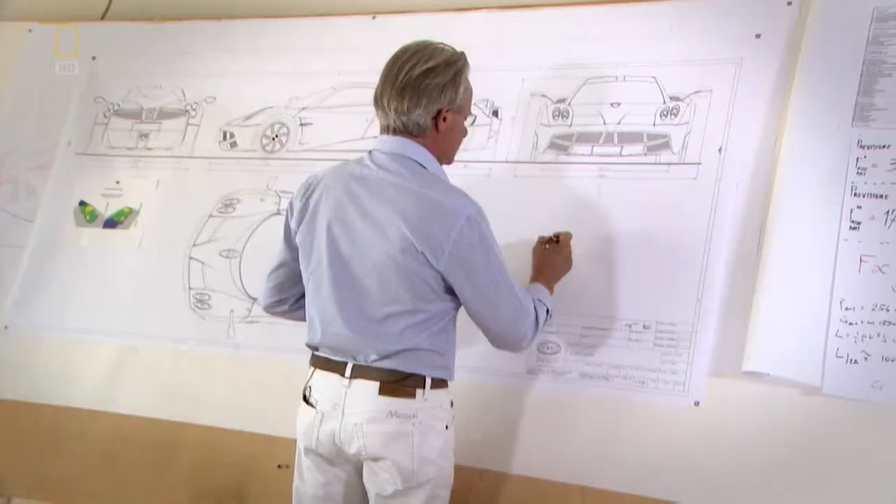So after 8 years of development, over 1 million kilometers of testing, endless design and redesign, and collaborators pushed to new limits, it's all come down to this: the moment that Horacio Pagani must decide if his masterpiece is complete, and he's ready to share his creation with the world.

Will 60 buyers finally get their cars? Or is the pursuit of perfection a road without an end?